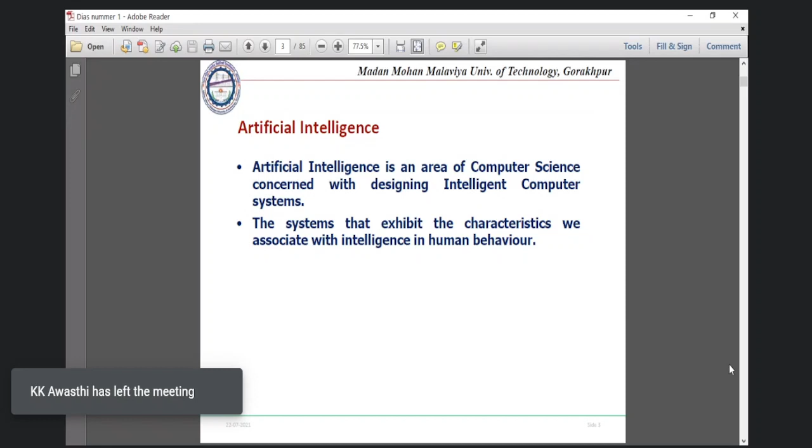We try to capture the intelligence associated with human behavior, or even in nature, whatever processes and happenings we observe, there could be some intelligence associated with that process. So we just try to replicate the intelligence incorporated in that particular process, which is given by our omnipotent God. And we try to incorporate it into some sort of machines, or give it to some algorithms or set of programs, so that it can also perform, as an artificial intelligence, in the same manner as the natural intelligent entity is performing.

So here, if we want to define natural intelligence as simply intelligence, we can say that, as I perceive, as I think, the absolute definition of this intelligence is not there, but there are some attributes through which we can

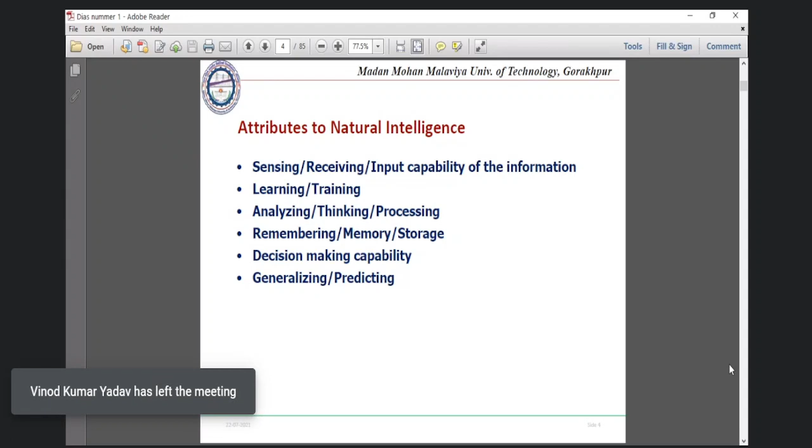coin this natural intelligence and understand what it actually is. The attributes are listed here in this slide. The first, very important one, is sensing, receiving, the input capability of information. Any system which we are going to call an intelligent system must possess a capability of taking inputs. Our computers have a provision to take inputs, and human beings have five sensory organs to take this input. Unless we are able to receive, the rest of the process will go worse.

The second most important thing is the learning and training capability. Intelligent systems or intelligent persons should be able to learn from whatever environment they are put into. Right from our birth, at every moment of our time, not only in schools, colleges, or institutes, but in the environment we face day to day, wherever we are residing, whatever we encounter, from that we are learning, we are getting a sort of training.

Whatever input, whatever training we have perceived, the information received is going to be processed in some way so that some useful or required output could result. This we call the third important attribute of natural intelligence: analyzing, thinking, and processing. Whenever a situation or problem comes to us, we try to find some way to tackle it. The technique or process we apply to solve that problem is nothing but analysis.

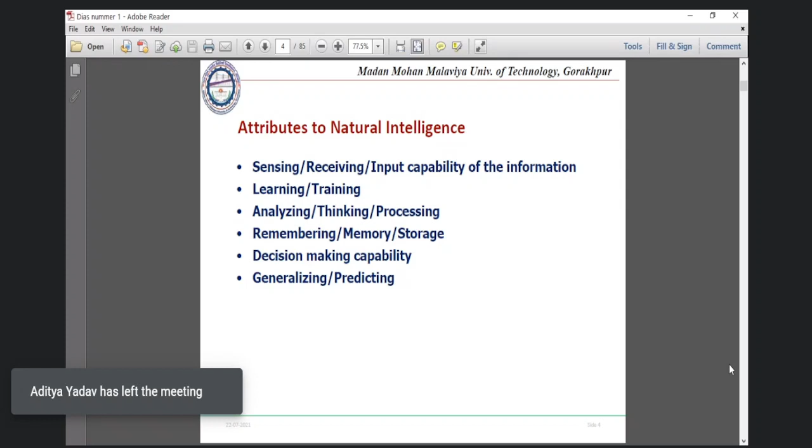The fourth one we can think of is memory, storage, or remembering. There is one component known as a neural network, also known as an intelligent technique, which has been replicated from the functions of the human brain. The human brain has thousands of neurons, and these neurons perform input, output, and several other functions, but their interconnections, the strength of interconnection of those neurons, provides the strength to the memory. The greater the interconnection, the greater our memory capability.

In the computer system, we have some storage chips. You might have seen the very famous movie Ghazni, where Aamir Khan had a short-term memory loss. Can you think of that person as intelligent? Of course not. Because even if other attributes are there, if you are not able to retain information, how will you ultimately process and give output? So this becomes again a very important thing. All computer systems are provided with some sort of memory, just as the interconnection of neurons gives us the strength of memory. This again becomes a very important attribute of intelligence.

Now, if I ask any of you, or you may ask anyone, what is intelligence? Most people answer that it is nothing but decision-making capability. And this is somewhat true, because this becomes the most important thing. Whatever you do, whatever the other attributes are doing, they lead towards this particular attribute: decision-making capability. We have to receive input, get some training based on that, analyze it, and based on our remembrance, for a particular set of data, we are going to take decisions and give some output.

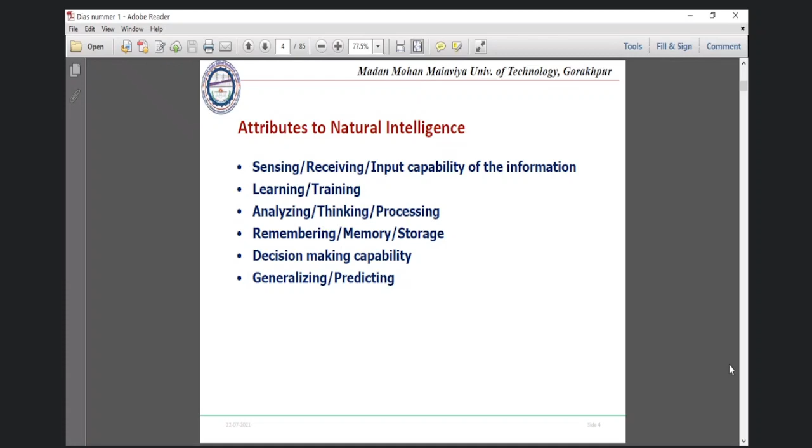Yes. So to be a little interactive, can anyone answer what is the most intelligent entity on this earth? Human beings. Anyone else? We may include the animals as well. Animals. See, if you Google it or search, lots of search engines are available. Chimpanzees are thought to be the most intelligent. The second one is the monkey, and the third one is the elephant. They have got the kind of this percentage of attributes more towards them, and then comes the human being, right?

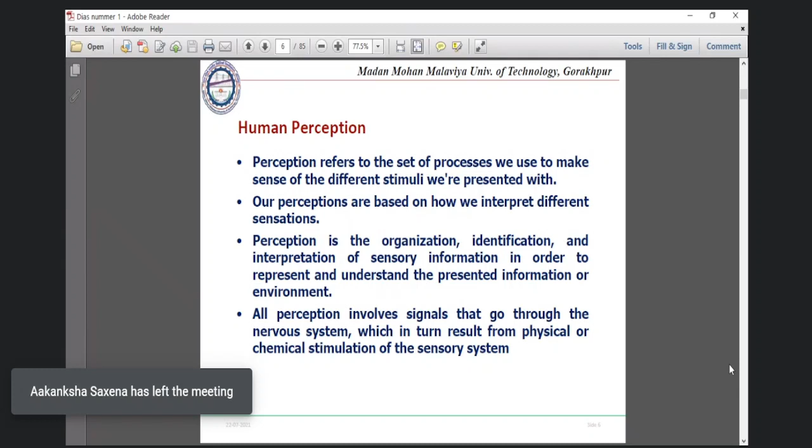Perception refers to the set of processes we use to make sense of different stimuli we are presented with. It is, in fact, the organization, identification, and interpretation of sensory information in order to represent and understand the presented information. Whatever we are presented with, we are provided with 5 sensory organs, which I believe all of you are familiar with. Through these, we take the inputs, and those inputs are the signals, the information. The processed signals become the information. With this information, there are some actions to be further taken, and that is again decided by some kind of processing that happens in our brain.

Whatever we perceive by heart, whatever we see, there are three components: conception, perception, and realization. Whatever we observe, we have a concept or notion of that. If that notion is fully understood and grasped, we call it perceived.

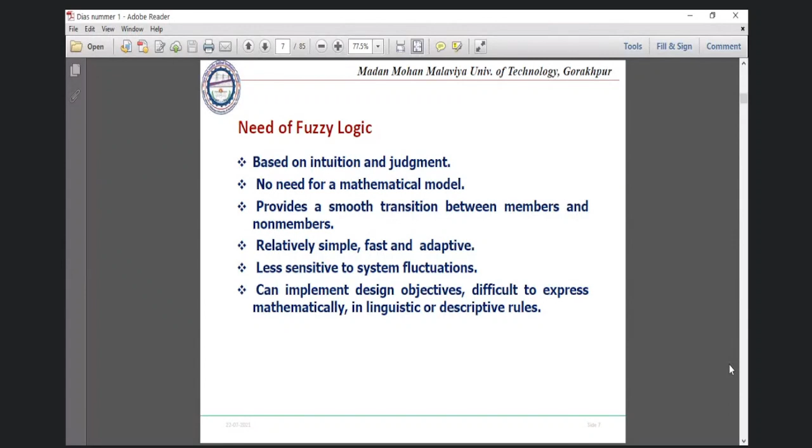Some more points: it's conceptually very easy to understand, very flexible, and as mentioned, tolerant to imprecise data. It handles vagueness, ambiguity, or uncertainty, and can handle partial truth. It can model nonlinear functions of arbitrary complexity, and it can be built on top of the experience of experts.

This could also be thought of as a limitation - the designer of fuzzy controls and fuzzy logic systems should be an expert, because most of the time we are using perceptions. This training may be done through other intelligent techniques as well, sometimes neural networks, but the designer has to be expert.

This is based on natural language, which makes it very simple and powerful. Fuzzy logic can be blended with conventional control techniques - we'll see this at the end of our talk.

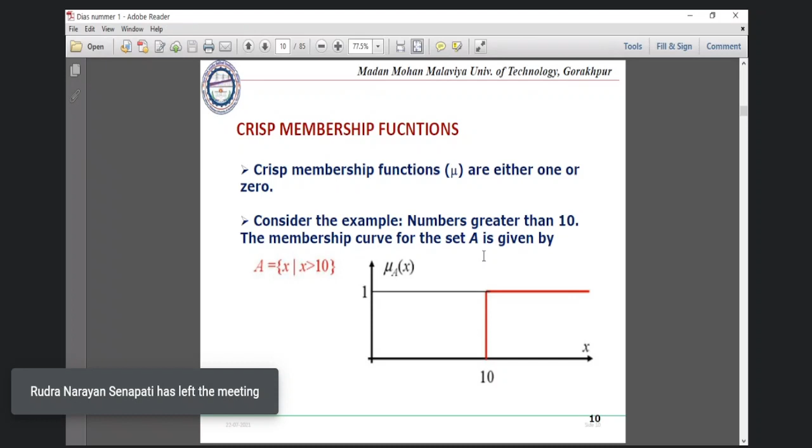So in this classical set, what we see is a very clear logic. Either the elements belong to set A or do not belong at all. So the membership value will be either 1 or 0. And this is given by the graph here: we have the element x, and mu A of x is the membership value. So in a classical set, the membership value is either 0 or 1. So this is Boolean logic also. The numbers which are less than 10 have zero membership function value, and those greater than 10 have 1.

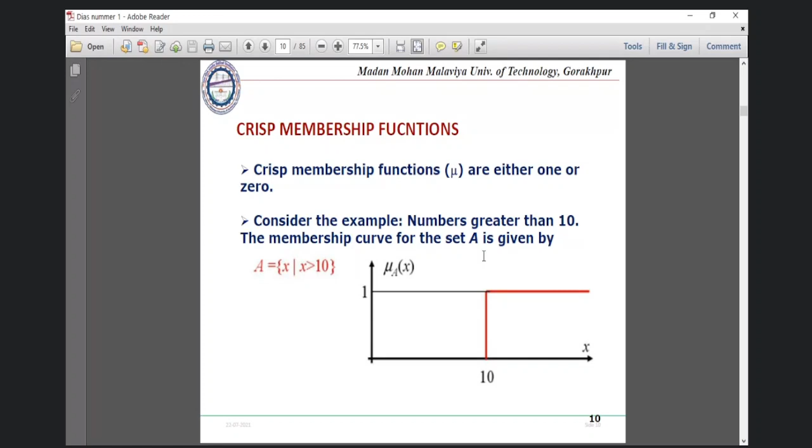But consider a situation where we represent men's height, and let's say we consider heights from 140 to 220 centimeters. We have to categorize this height. So let's say if a person's height is less than 160 centimeters, we'll call those persons of short height. Sorry, let me assume from 170 to 180 as medium height, and let me assume height beyond 190 centimeters as tall, and of course it could not be more than 220. So let me limit it here.

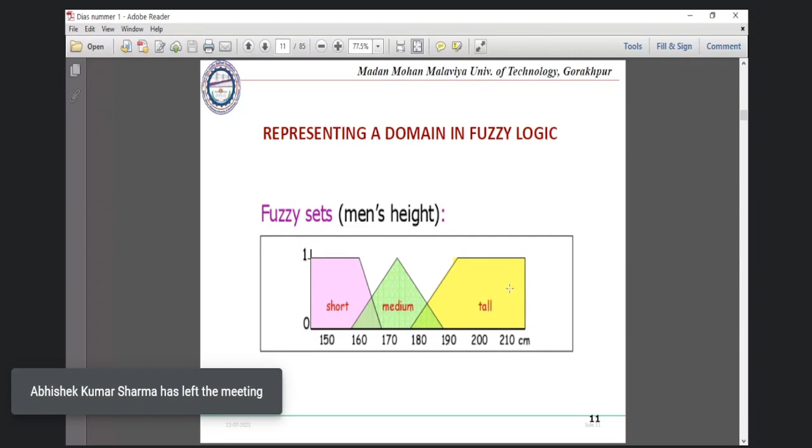Now you can see in this picture there is a lot of overlap between short, medium and tall. So there is no crisp boundary, no clear-cut boundary. Let's say you decide 165 centimeters as the boundary, below which you consider short height and above which medium height. This will not be good at all. Just think of a person who is 164 centimeters and a person who is 166 centimeters. So having a clear distinction, a particular threshold value, will not be wise at all.

So what we do is have an overlapping sort of thing. We can categorize up to 160 maybe as short, but from short to medium or from medium to tall, there is a gradual change, or the boundary is a thicker one. So persons clearly less than, say, 160 will be short, those above 190 will be tall, and in between will be medium. But if a person is 165 centimeters, he can be thought of as short and medium as well. So we can provide some membership value: he is short up to this percentage, medium up to this percentage.

So there is a notion called membership function, which will be assigned to this phenomenon to get a clearer picture. Fuzzy membership functions describe an element x in a set A through a membership function mu A of x. This mu of x will not only have the values 0 and 1, 0 for those not belonging to the fuzzy set and 1 for those completely belonging, but values in between for elements which partially belong.

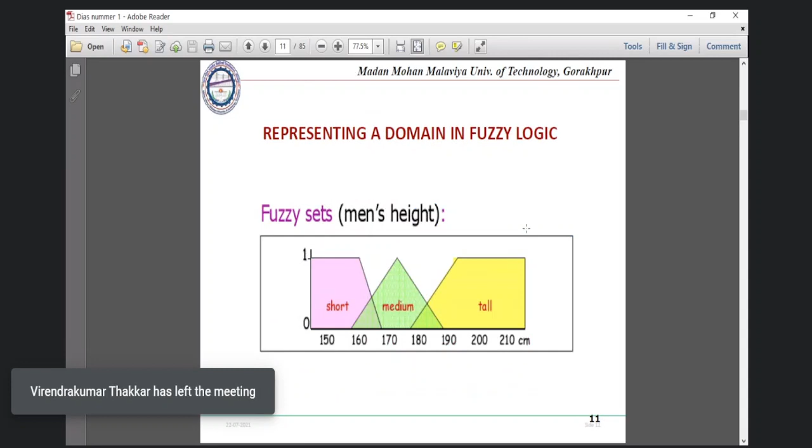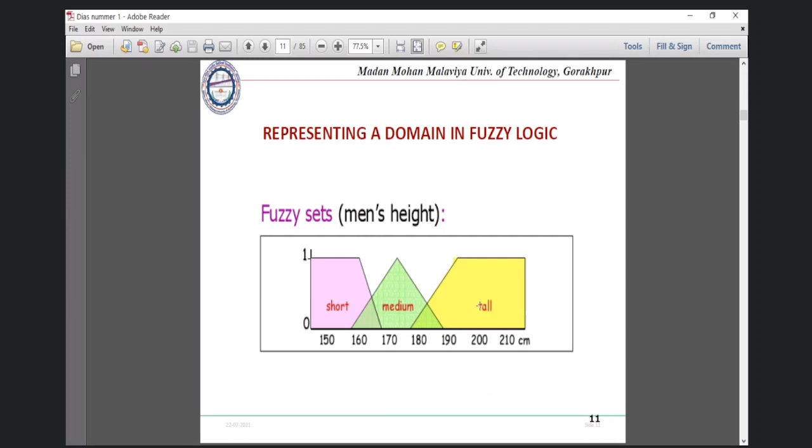So let's say mu tall of 200. Go to the previous slide. See here, 200 centimeters lies entirely in the tall region, so you can assign 200 a membership value of 1. Similarly, 160 centimeters does not belong to the tall region, so you can assign 160 a membership value of 0 for the tall fuzzy set. Like that, you can express this situation in a better way, and that is the power of fuzzy logic.

So in fuzzy logic, you have the elements and the membership function associated with those elements, and they can vary from 0 to 1, representing the degree of belongingness to the set or the degree of truthfulness of that particular phenomenon.

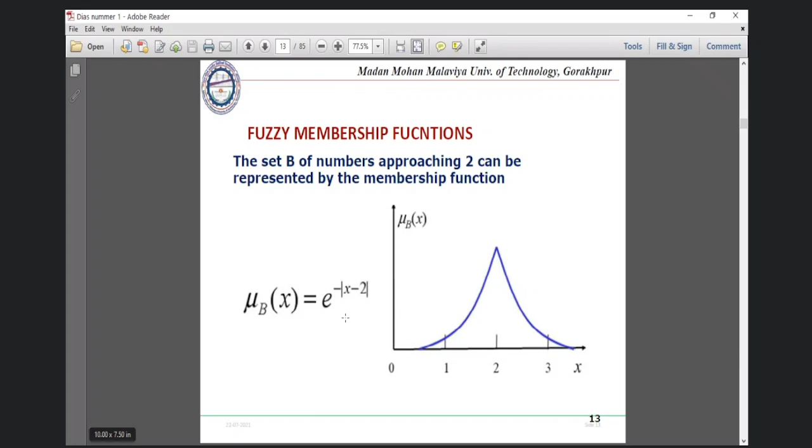So in case of discrete, that was the representation, but there could be a situation where this membership value you need to represent as functions. So here is an example for that. The fuzzy set B, the numbers approaching 2, can be represented by a membership function like this: e raised to the power minus of modulus of x minus 2.

Now, one very common misconception is about fuzziness and probability. Fuzziness is entirely different from probability. In probability, what we see is the chances of happening of an occurrence. So if the probability of a particular event is, let's say, 0.2, it just represents the chances of occurring of that particular event. But fuzziness is entirely different. It represents the belongingness to that particular set: an element is contained in a particular set, and how much it is contained.

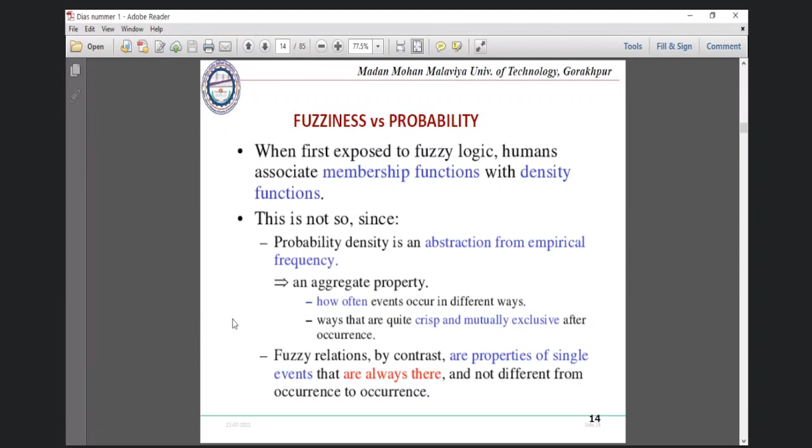So to understand this particular thing, we can take one example. Let's say we have a situation where there is a bottle C, which is labeled with mu C as 0.95, and another bottle A is labeled with some probability function as 0.95. So how are we going to interpret this?

The membership of 0.95 means that the contents of C are fairly similar to perfectly drinkable water. We have a set of all drinkable liquids, so 0.95 is close to perfectly drinkable water, but it will not contain some poison or something.

But the probability of A means that over a long run of experiments, the contents of A are expected to be drinkable in about 95% of the trials. In other words, it may contain poison also. There are 95% chances it will be safe, but 5% chances that it will not be safe to drink. So if that event occurs and you consume that water, it is poisonous, and this will become very dangerous for you. So this is how we can think of fuzziness as different from probability.

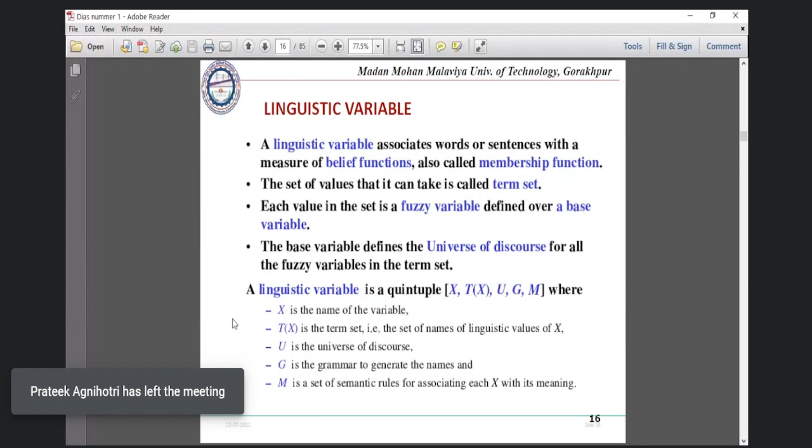In the earlier slide we categorized height as short, medium, and tall. These are nothing but variables; we call them linguistic variables. A linguistic variable associates words or sentences with a measure of belief functions, also called membership functions. The set of values that it can take is called the term set, and each value in the set is a fuzzy variable over a base variable, and the base variable defines the universe of discourse to which all the sets belong.

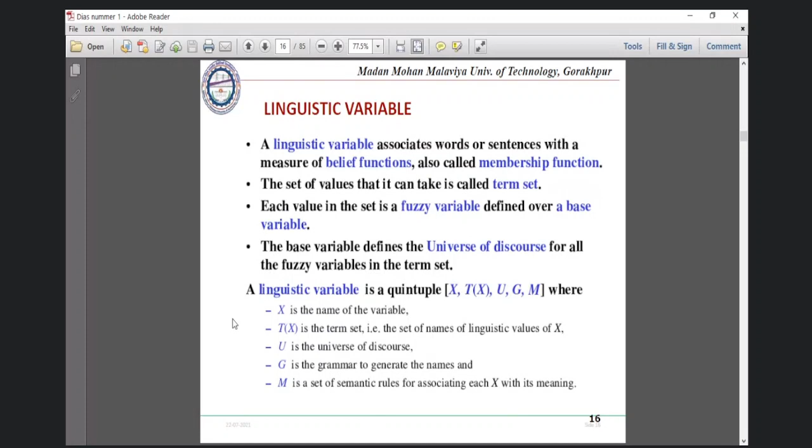So a linguistic variable is a quintuple of 5 things: x, T(x), U, G, M. X is the name of the variable. T of x is the term set. U is the universe of discourse. G is the grammar to generate the name. And M is the set of semantic rules associating each x with its meaning. So this is the terminology. One by one, in the next few slides, we'll be looking at some terminology and concepts of fuzzy logic.

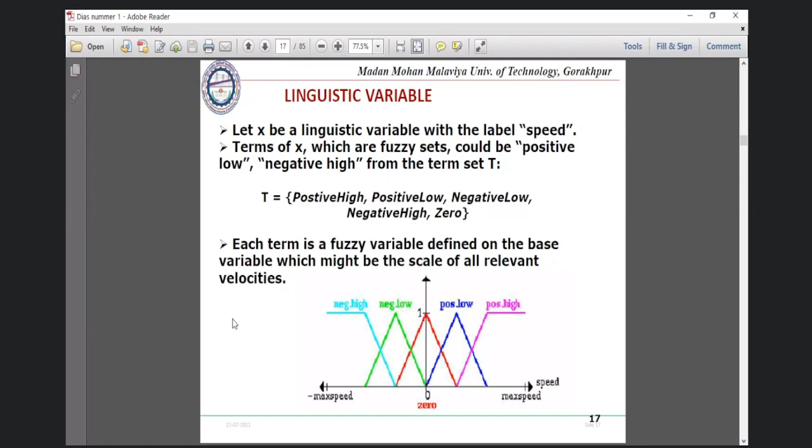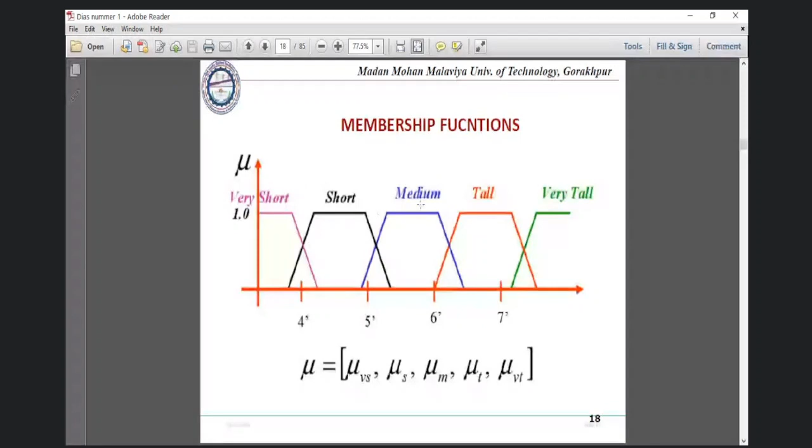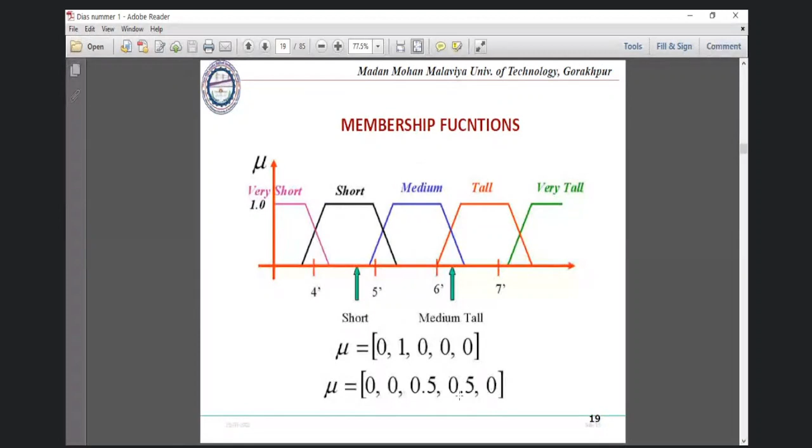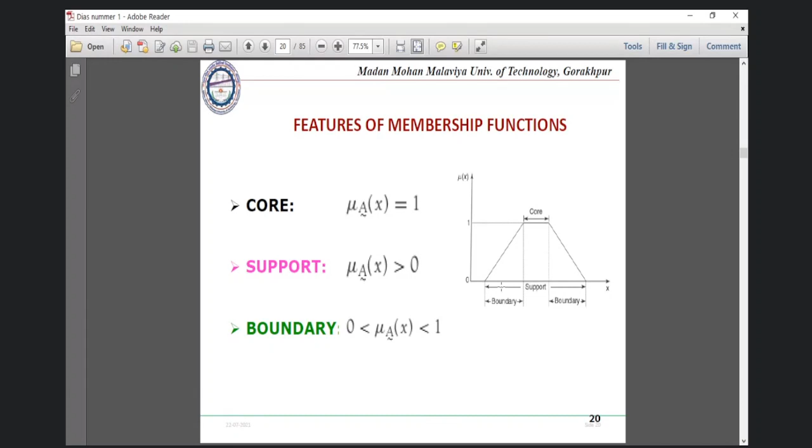And then the boundary we can define as the membership values lying from 0 to 1, and not equal to 1. So clearly you can see in the picture, there is the boundary, in between there is a core, and the total range is support, and where the membership value is 1 is your core. So these are the terminology related to the membership function.

Another component to this fuzzy system is fuzzification. So I have seen the linguistic variables.

So is everything fine, my voice level and PPT? Yes, sir. Okay.

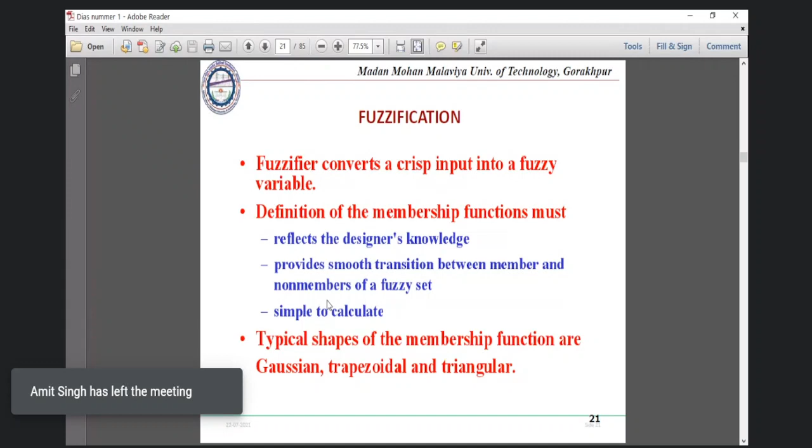So another terminology related to this is fuzzification. In fuzzification, what we do is we have a crisp input and we try to convert it into fuzzy variables, because for the fuzzy system, the input will always be the linguistic variable. So we need to convert into this fuzzy variable from the crisp data set, and there are various methods to it, of course. One prominent method is intuition itself. So we'll use our intuition, our perceptions, to convert those crisp input sets into some sort of fuzzy variables to give to the fuzzy systems.

So the definition of membership function must reflect the designer's knowledge. This provides a smooth transition between members and non-members of the fuzzy set, and that is why we check overlapping in all the categories.

Typical shapes of the membership functions: though various shapes are available, Gaussian, trapezoidal, and triangular are the typical shapes. And most of the time, researchers have used the triangular. In one of the research papers I was going through, the author applied many shapes of membership function, and finally concluded that the triangular one gives the better results.

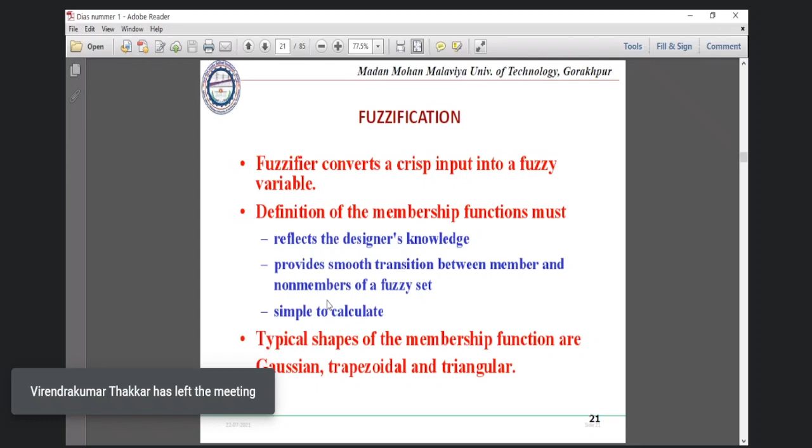And again, how many membership functions have to be taken? Again, there is research over that. In that paper also, they have taken 3 membership functions, then 5, then 7, and further. So there is another thing, which is the number of rules. If you increase the number of functions, of course you will be increasing the number of rules as well.

So if you are with a smaller number of rules, you will be comfortable. But if you are with a large number of rules, of course, those rules may be conflicting in nature. And with that conflict, your results may not be better.

And you have to take more and more care while designing this fuzzy logic system. So that is why we come to an optimal number of membership functions.

So in that paper, I forgot what was that paper. If I see it, I can share that paper at the end of this with the organizer. Those who are interested may refer to it. That's a very wonderful paper.

So in that, the optimal number of membership functions was taken as 7. So the 7 will lead to a large number of 49 rules, right? So what we want to do is, number one, we want to make our problem as simple as possible. And number two, we want to be more accurate. For being more accurate, we want more and more rules.

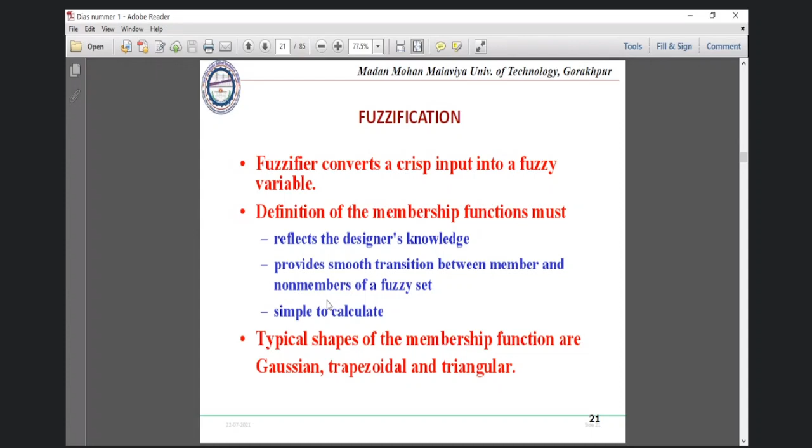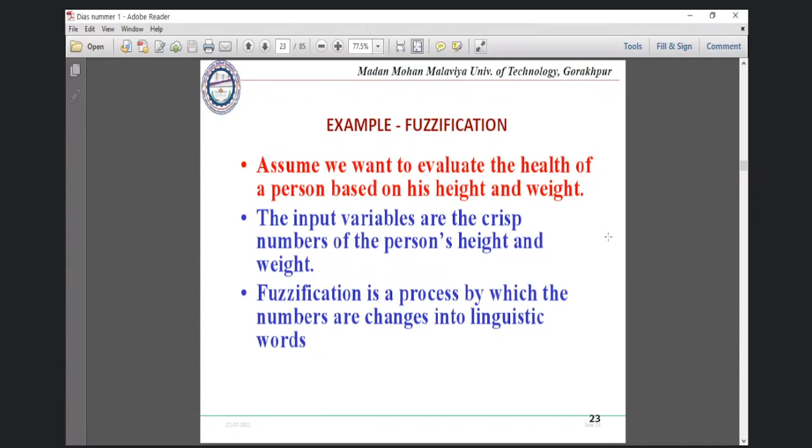So suppose you want to evaluate the health of a person based on his height and weight. So very quickly, I'll show you this example. The input variables, let's say, are the crisp numbers of the person's height and weight. So how it is going to be fuzzified, see in the next slide.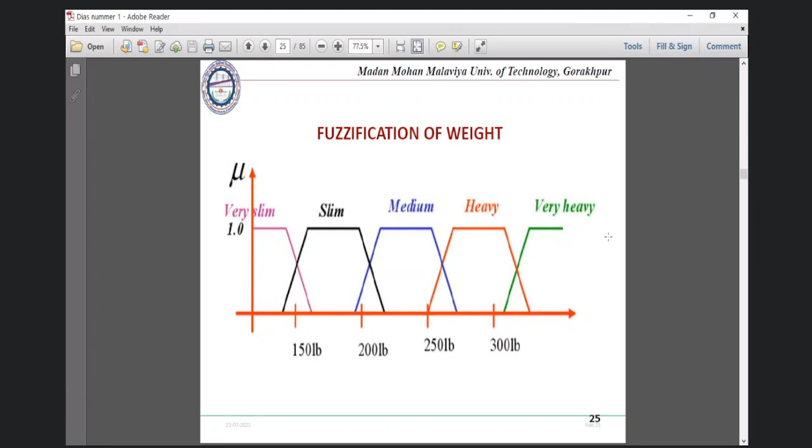Then there are various methods for it. Of course, I'm not going into detail. One I told earlier, the method of intuition; there is the method of inference, rank ordering, angular fuzzy sets, neural networks. Sometimes genetic algorithms are also applied to fuzzify these crisp values. Inductive reasoning is also one of them. You may refer to the literature.

So having understood the first component, fuzzification, now we have the fuzzy linguistic variable ready to input to the fuzzy system. And in between, there is a process. That process will have some sort of transfer function, or here it is a rule-based system or knowledge-based system. Rule-based we'll discuss after defuzzification.

And defuzzification is, in fact, needed. You get the output of this fuzzy system as a linguistic variable, but many times you need to take the crisp value as a command to the controller. So you need to again convert these fuzzy variables into crisp variables to get the actual control.

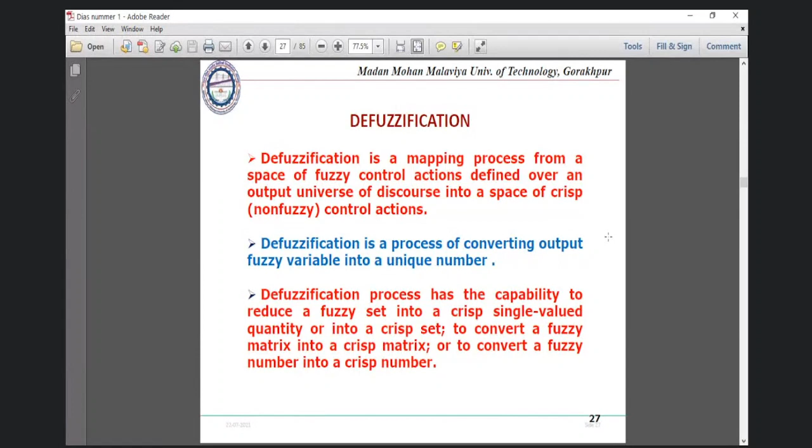So again, there are various methods for the defuzzification: maximum membership principle, centroid method, weighted average method, mean max membership function, center of sums, center of largest area, first of maxima, last of maxima. These are the methods. If you are interested, you can again refer. Just to give you a glimpse of one of the methods.

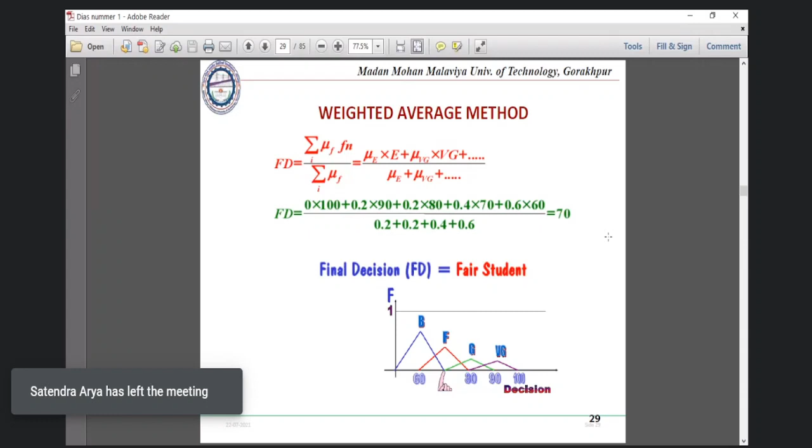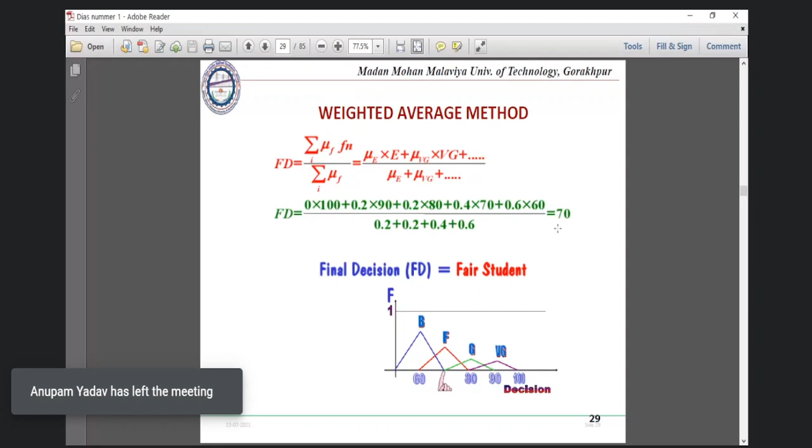So just 30 seconds, I'll take a pause. So, I'm sorry. Is everything okay? Just anybody? Yes, sir. Okay.

So this is one of the methods for defuzzification. From this fuzzy input, we have got some crisp value as 70 here. So these are nothing but all mechanical methods. If we see, we can easily understand those methods.

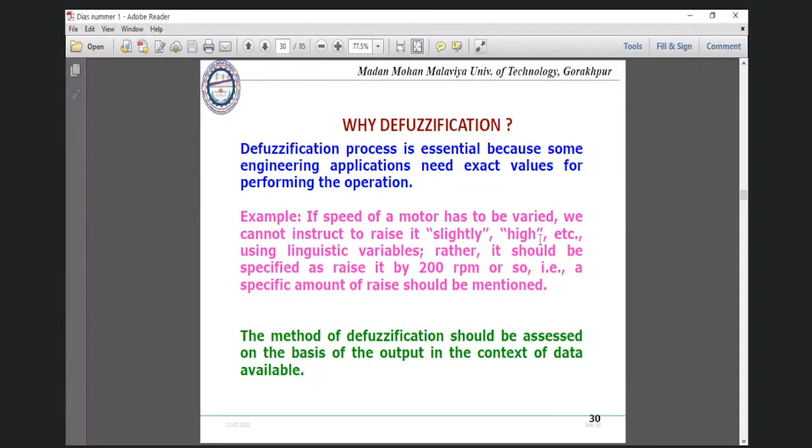Now, why is defuzzification needed? See, suppose the speed of a motor has to be varied; we cannot instruct it in linguistic terms, say raise it slightly or raise it high, using this linguistic variable. So what we do is we try to convert it into the crisp equivalent value. So it should be something like raising by 200 RPM or some other value. So this is why defuzzification is needed.

Now, coming to the heart of this fuzzy system, what we call fuzzy rules, right? And I have repeated many times that fuzzy is replicated from our human perceptions. And in human perception, the logic is: if X is A, then Y is B. The reasoning in our mind always goes something like this: if this is the situation, then this action has to be taken, else some other action has to be taken. So these fuzzy rules consist of if-then, and maybe if-then-else, sort of rules, right?

So just think of a situation where, in winters, at the start, let's say in October or November, we feel a little cold, and then as December comes, we feel a little more cold, and then at the fag end of December or the start of January, there is peak cold, right? These inputs of coldness we take through our sensory organs, and we are not going to measure them through some crisp value, putting in a thermometer or some temperature measuring instrument.

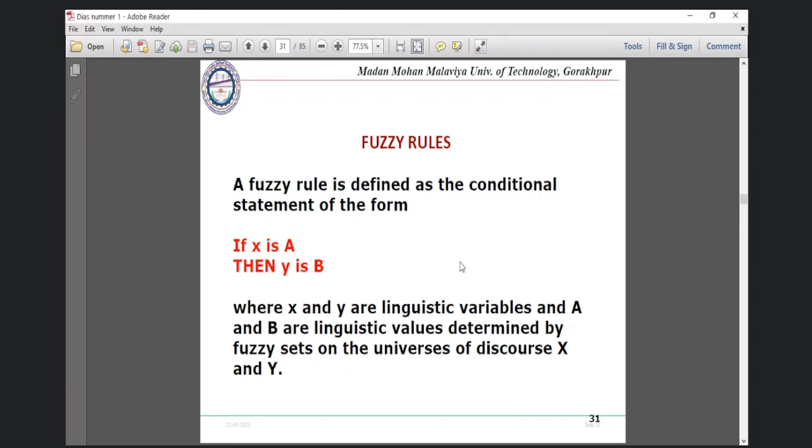So we were on this fuzzy rule base, discussing the kind of rules we'll have, like if X is A then Y is B, and depending on the situation, the number of rules are decided. In this reasoning, what we call the antecedent and the consequent: if the antecedent is something like this, then what will be the consequent out of that? In this decision-making process, rules with sentences use conjunctives like and, or.

Each rule corresponds to a fuzzy relation. This relation again we can think of as a function of functions, as we have seen in classical sets. The same notion has been extended to fuzzy set theory, so we have fuzzy relations and fuzzy mapping. I'm not going into detail of that. So through fuzzy relations, we are trying to achieve some output.

For example, let's say if distance x to the second car is small, or distance y to the obstacle is close, and the speed v is high, then perform large corrections to the steering angle theta, also make medium reduction in the speed v. This rule gives you information on how these rules are framed. There could be three antecedents here, giving you two consequences, two outputs. These are again dependent on the problem.

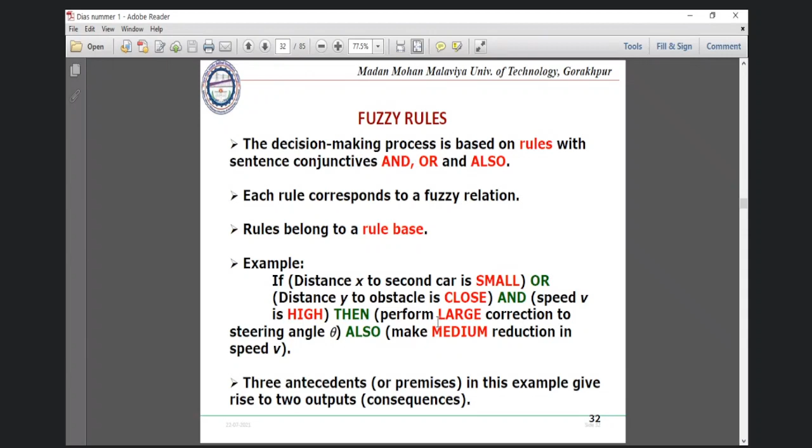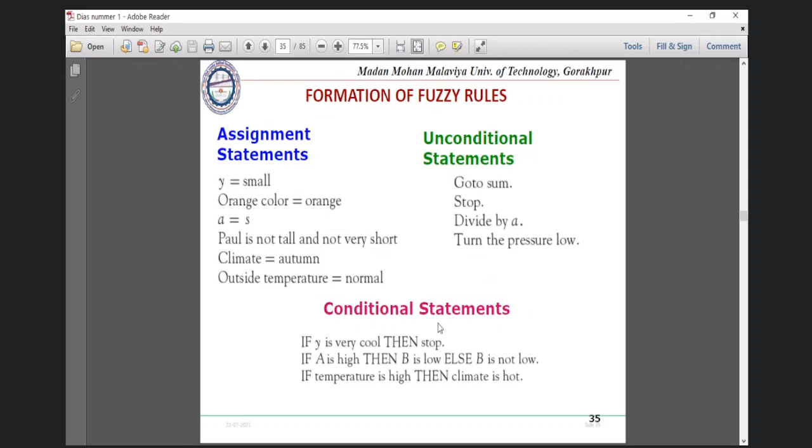In assignment statements, examples cited are something like: Paul is not tall and not very short, Y is some small, something like that. In unconditional statements, we just go to sum or stop, divide by something. And in conditional statements, if y is very cool then stop, something like so - this depends on some conditions.

Then further, the decomposition of these rules: a compound rule is a collection of several simple rules combined together. So there could be multiple conjunctive antecedents or multiple disjunctive antecedents, and there could be conditional statements also using else or unless.

This intersection operation - you can just think of these as equivalent. This AND logic is equivalent to intersection in set theory. So in reasoning we denote this AND logic, and we can combine it all into AM, and simply say if X is AM, then Y is VM. So AM and VM are the input and output fuzzy linguistic variables related to these fuzzy sets.

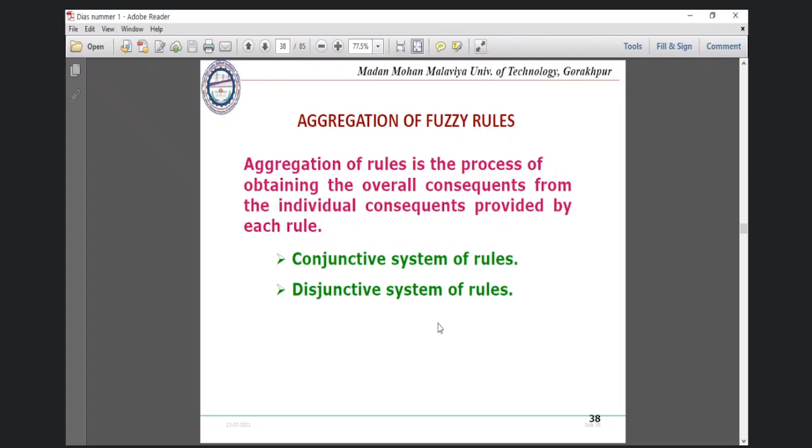Now, all these fuzzy rules are aggregated to obtain the overall output or the consequents from the individual consequents. So there could be several outputs and they could be superimposed to get some final output. This is again similar to that, showing this aggregation of fuzzy rules.

This one example: let me have three rules. Rule 1: if height is short, then weight is light. Rule 2: if the height is medium, then the weight is medium. Rule 3: if the height is tall, then weight is heavy. So suppose I take these three fuzzy rules.

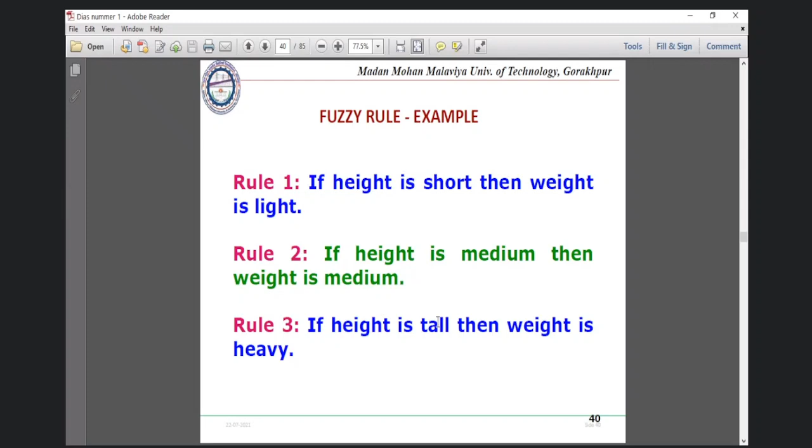So our problem is: given the membership function for short, medium, tall height, and light, medium, heavy weight, the three fuzzy rules, and the fact that John's height is 6 feet 1 inch, estimate John's weight based on this height information. So we can go through this.

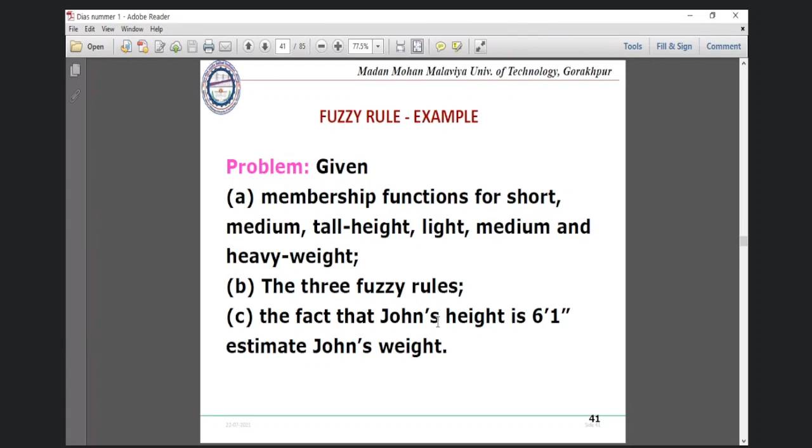Let me again assume the membership function, the overlapping and all, you just take this. Suppose John is short with a degree of membership function as 0.3, medium height with 0.6, and tall with 0.2. So each rule produces a fuzzy set as the output by truncating the consequent membership function at the value of the antecedent membership function.

See how, for rule 1: here mu denotes the membership function, and here the weight is on the x-axis. See this darker white line is for the weight.

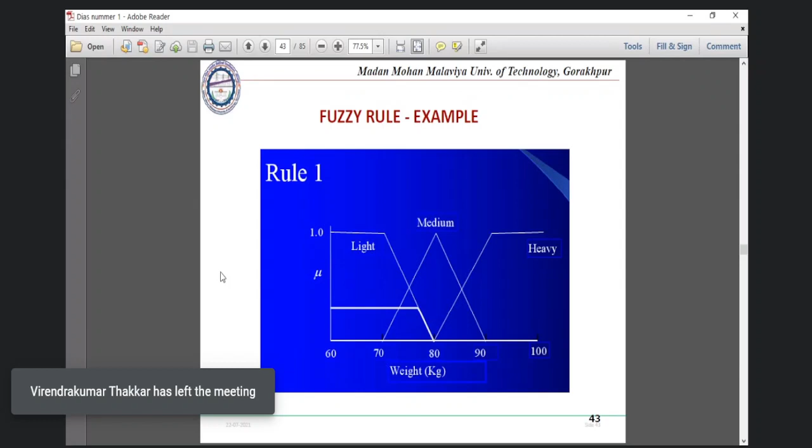If the height is short, then the weight is light. You can see here, if the height is short, so the weight has to be low - this is what anybody can think of. So this is what the outcome of the perception is.

So in this way, we'll take an operation. What is the operation? All three rules have to be simultaneously taken - they have to be true. So for that, we'll have the intersection operation.

If we go for the intersection operation in the classical set, what we do is take the common elements of the two sets. Intersection means if statement 1 is to be true and statement 2 also has to be true, then the overall event will be true when both statements are true. So in a classical set, if there is set A and set B having some elements, the A intersection B will have some elements which are common to both A and B.

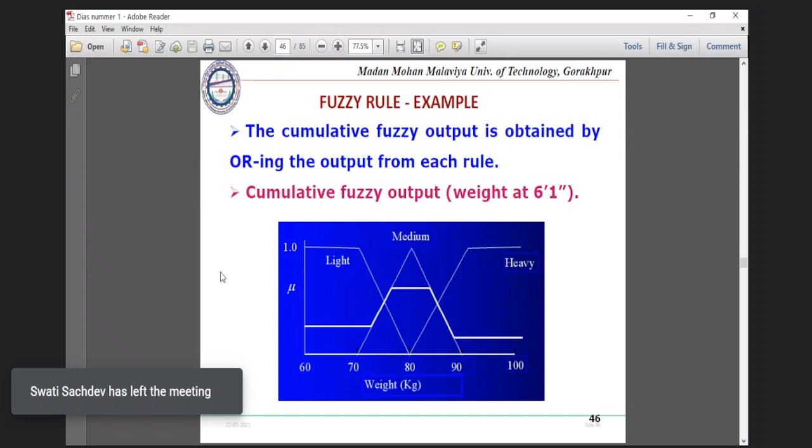Similarly in fuzzy sets, if there are fuzzy set A and fuzzy set B, there are elements in fuzzy set A associated with some membership function value, and elements in B associated with some membership value. Those elements will be common, so we take all the elements in the intersection of this fuzzy set, but with the membership function which is the maximum of the two for union. But for the intersection we take the minimum of the two - the minimum membership function for a particular element as the membership function for the intersection of the two fuzzy sets.

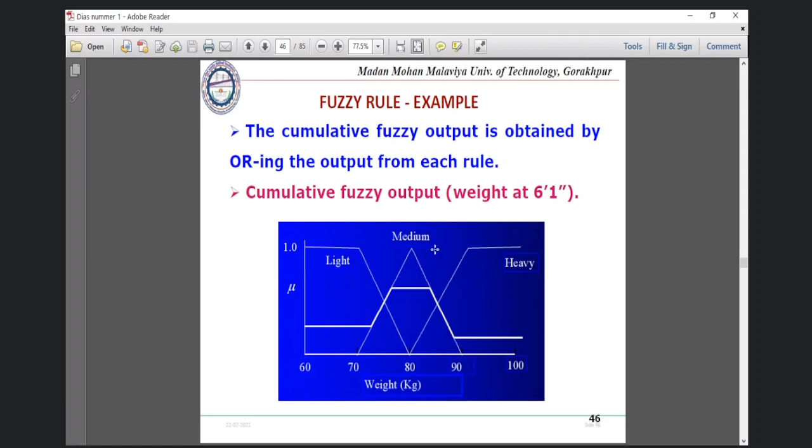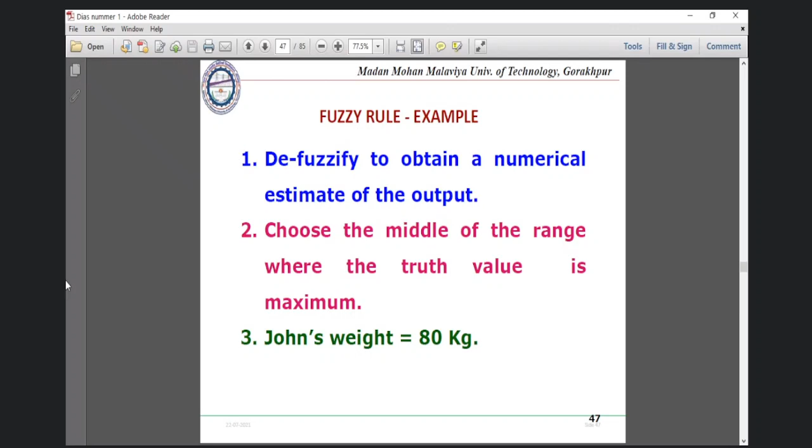If we go through this graphically, we can have this shown with the darker white line. So if we have this fuzzy membership value as the output, or the linguistic variable as the output, now we can defuzzify it - as already discussed, we'll defuzzify it and get the weight value.

Coming again to the fuzzy inference system, which we have already discussed a little. All the fuzzy rules are nothing but just a part of this fuzzy inference system, and they contain if-then logic rules, and they are in fact the system which gives you the fuzzy output. So all the fuzzy rules are contained in this, and we call this FIS, fuzzy inference system.

The primary function of this FIS is decision making through if-then rules. This FIS is what we work with for fuzzy control design. At the end, we'll see how this FIS editor is there in MATLAB's fuzzy logic toolbox, and how we can set the values and design the rules through this FIS system.

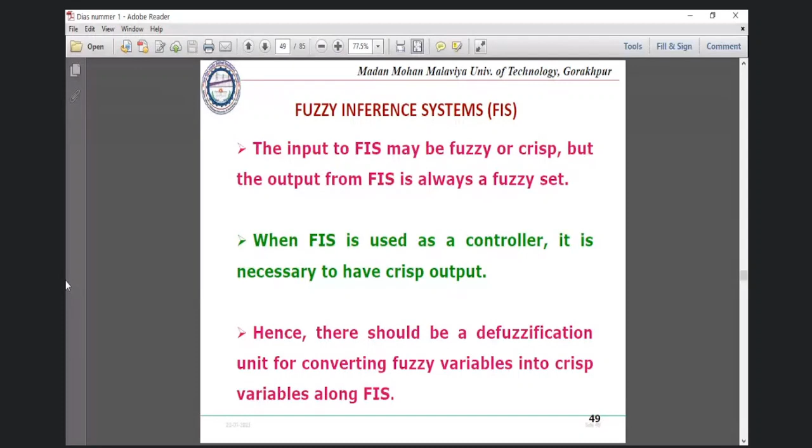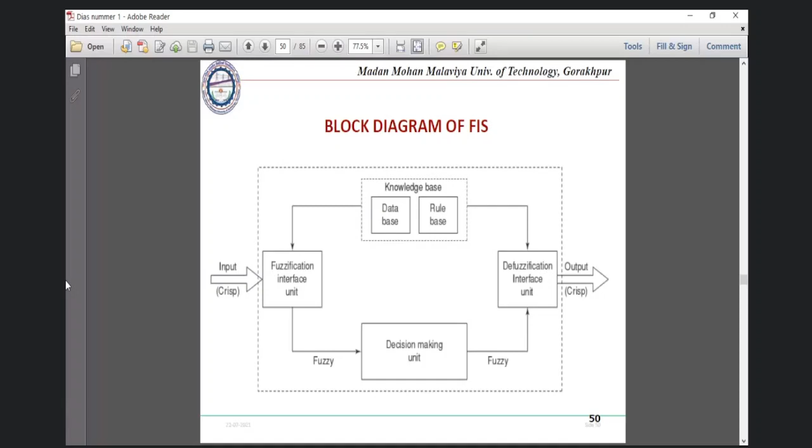There are two types of this FIS system. One is your Mamdani and the other one is Sugeno.

In this Mamdani fuzzy FIS, these input variables are linguistic variables. We need to determine the membership values first, and then we evaluate the rules based on the membership value, then aggregate the rule output, unify all the membership values for the output from all the rules, and then finally defuzzify the output.

There are various methods here, one such is called center of gravity, and this is sometimes called approximation by summation. This is a very simple method, similar to what we have seen in mechanics for how to find out the formula for the center of gravity.

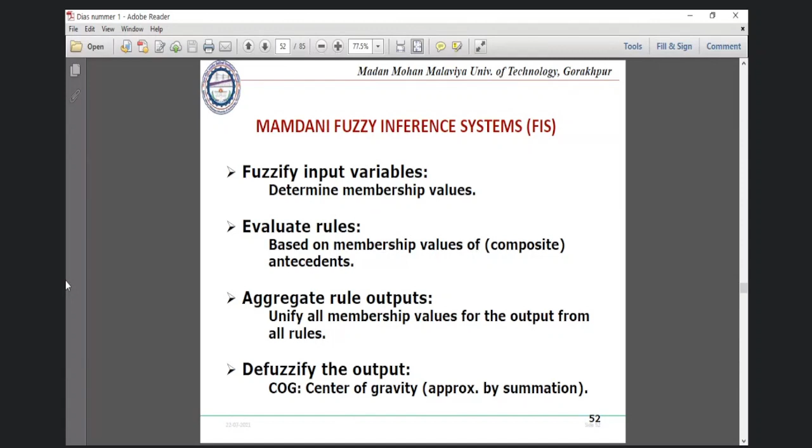In Sugeno kind of FIS, again there are mainly the same steps. The main difference between Mamdani and Sugeno method is that Sugeno output membership functions are either linear or constant. So they differ in their output variables.

So with this notion of fuzzy logic, now we can move to the fuzzy control system. Here is a control system. What we mean by control system is something to achieve the desired objective. So the process, or set of systems through which we obtain the desired output, we call the control system.

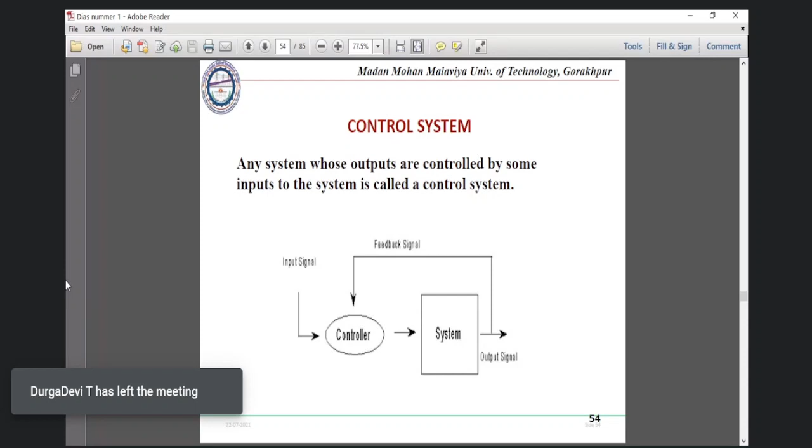There could be the whole system put together to achieve that objective, or there could be a single dedicated device known as a controller to achieve that objective. So this is all for the control system. And of course, we had seen there are broadly two types: one is open loop and the other is closed loop.

In the open loop case, the accuracy of the output mainly depends on the input calibrations, and there is no other tool to handle the desired output. But in the feedback sort of thing, which is most popular, what we do is try to measure the output obtained, and then compare this measured output with some sort of reference or checkpoint, and thus we obtain some error.

With this error, we give it to some device which we generally call a controller, and generate some control signal, through which we try to manipulate some variables known as manipulated variables or controlling variables, the variables by which we get control over the controlled variable or output variable. So the output variables are the variables for which we want the desired reference or set point. But this we obtain through some controlling variable that we call the manipulated variable. So we generate a command signal through the controller to manipulate that particular variable.

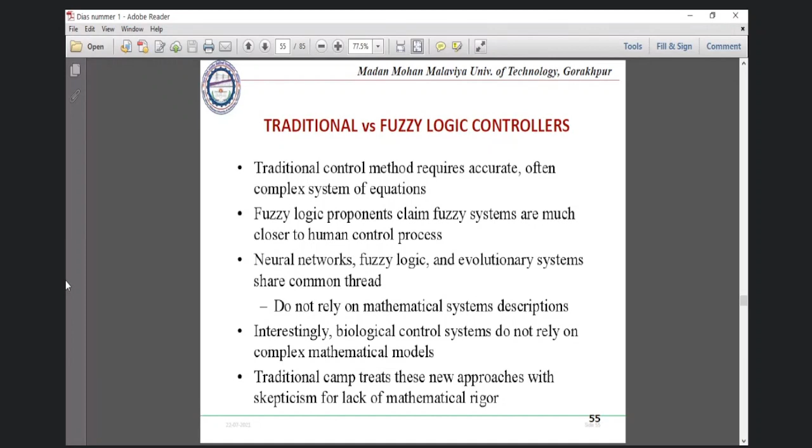There is one important point here: the fuzzy control. Our most important application of this fuzzy control theory, fuzzy set theory, in fact. This expert knowledge is used instead of a differential equation to describe a system. Means the designer of this fuzzy logic controller must be expert. They must be familiar with the kind of designing this fuzzy rule.

Suppose we are designing, let's say, a fuzzy controller for the speed control of the motor. So the designer must be familiar with, if let's say the speed is high, what the range of the voltage or the other variable is required to make that speed high. Similarly, if the desired speed is low, what is the equivalent range of the voltage, or let's say if some flux or some other variable is involved, what is that range.

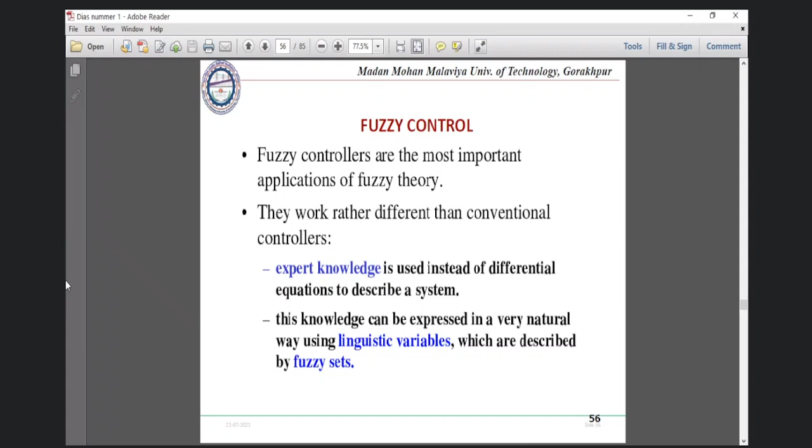So that particular expertise, that particular knowledge should be there with the expert who is going to design this fuzzy logic controller. The most powerful thing is we are going to use this natural language as linguistic variables.

Although application of this fuzzy logic to industrial problems has often produced results superior to classical control, the design procedures are limited by the heuristic rules of the systems. This is very, very important. And see, there are situations where this application of fuzzy logic control will be justified, though the researchers are using it at so many places. Sometimes it is required and sometimes it may not be required. Still they are using it for the sake of research.

But there are situations where this has to be applied. So one should be very, very cautious, in fact, about where to apply this fuzzy logic controller and, right, where not to use this, right?

So this fuzzy logic based approach for solving problems in control has been found in those systems generally which are very, very complex, and some of those which happen to be non-linear, some having some parameter uncertainty, right? So in fact, this technology is applicable to situations where imprecision, or vagueness, or uncertainty is there. So many of the researchers are using this fuzzy control in the robust control area. The robust control area is again an area where people handle this uncertainty.

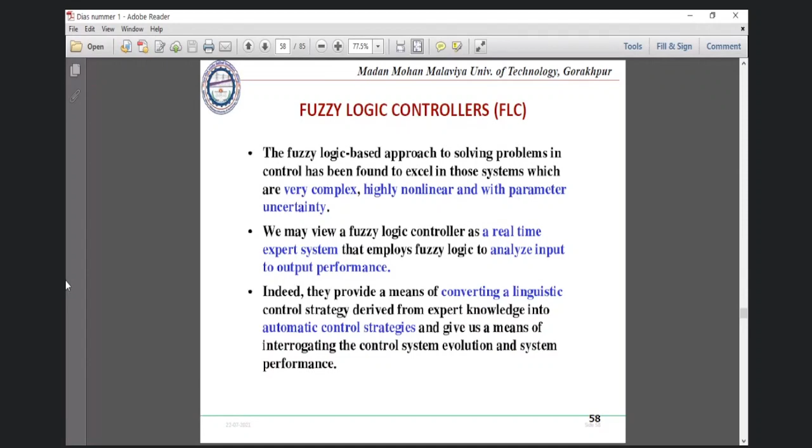So out of this measurement, in general, in a fuzzy system, we have the error as one thing. And along with that error, we have in general the change in error, the rate of that error, how this error is changing. So these two informations we feed to the controller, and the controller also has some reference set point, and then this generates control effort U, which is in fact the objective of this control design. So we have to design this control effort U so that the objective is achieved.

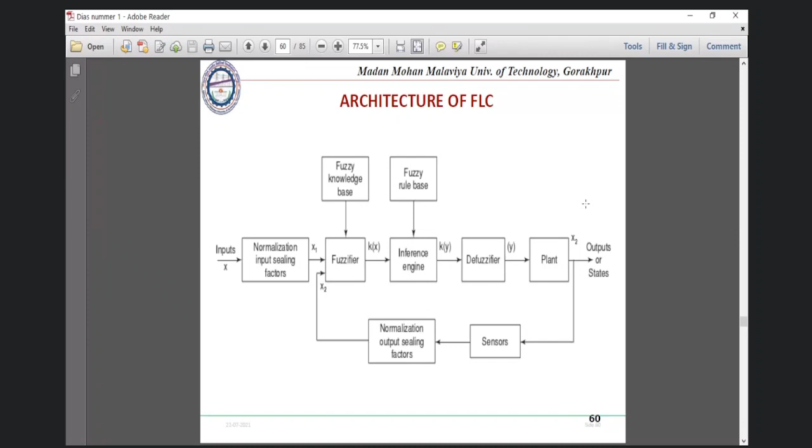And then for the input, this is again converted through the normalization input scaling factors into some suitable form, and then given to the fuzzifier block so that the linguistic variables are obtained, taking the help of the fuzzy knowledge base. This is given to the fuzzy inference system, which takes help of the fuzzy rule base, of course, and then the output is defuzzified through the defuzzifier block, and finally the crisp generated control effort is given to the plant to take the final control action, and this way the final objective of the control is achieved.

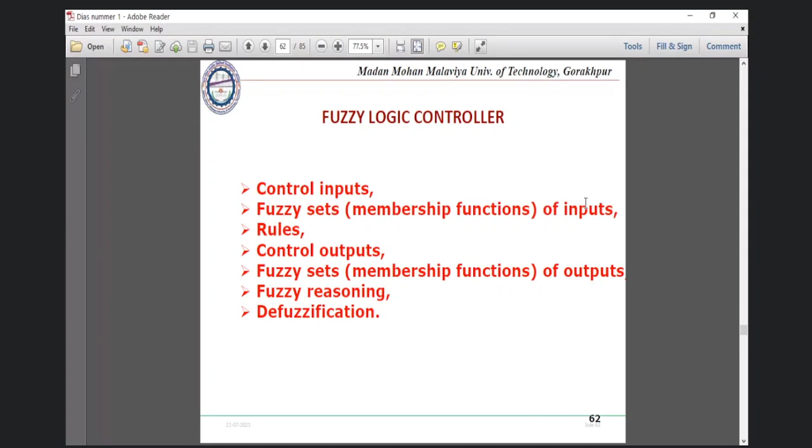So this is some description we have already discussed. This fuzzy logic controller: we have seen the control inputs, fuzzy sets, rules, control outputs, fuzzy reasoning, and defuzzification. These are the components that we have seen. And there are again some points written here. The control input, as I just told you, in general is what we take as the error and change in error. Right?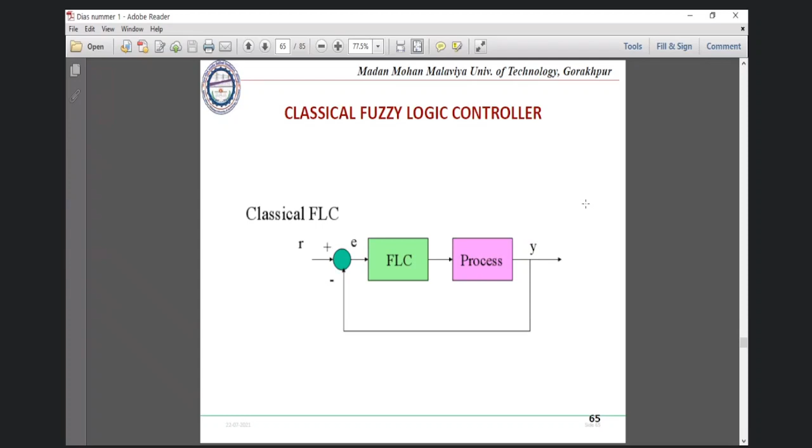Again, this slide doesn't need any explanation. This is just a picture of the classical control. Now this fuzzy logic controller takes the place of that classical control. As an example, we can take what is very, very popular, the PID controller: proportional, integral, and derivative. Even today, most industries take the PID controller as their controller. This is a very, very excellent controller. And of course,

these do not actually require large effort or thorough knowledge. Even a foreman can tune this PID controller. There is a very conventional empirical tuning method, the Ziegler-Nichols method. That's some empirical formula sort of thing. So if we have some control objective, what will be the parameters of this PID controller, Kp, Ki, and Kd? With the perception of that expert, we can just tune this PID controller.

So what, in fact, are the control objectives? In general, we want the system to behave in a fast manner. We want the fast response, one thing. We want no overshoot in the system. And we want that if the output settles to a certain value, it should not have any deviation from the nominal or reference value, what we call the steady state error or offset. There could be other objectives as well, but you can think of the primary control objectives as fast response with no or less overshoot, and second, no steady state error or the minimum possible steady state error.

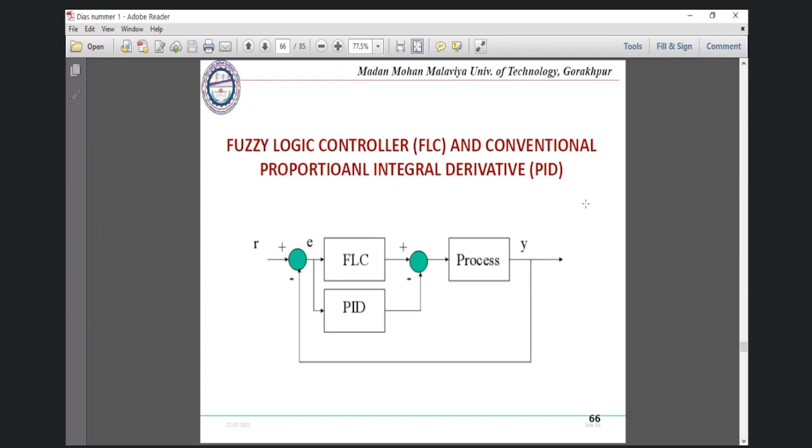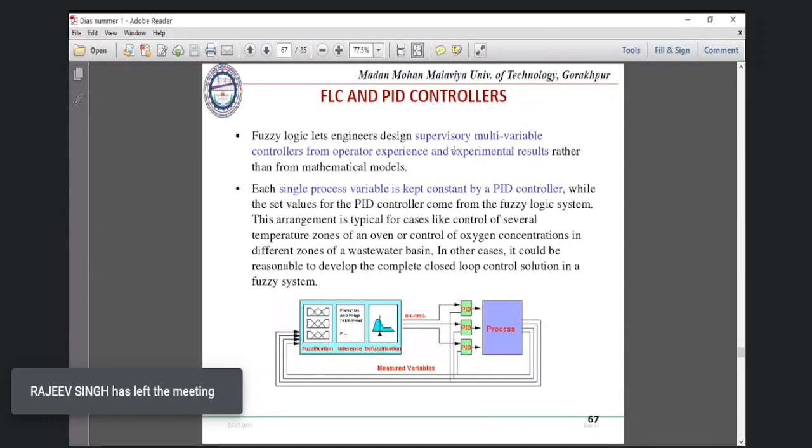So here I have taken one such example where I'm using FLC and PID in parallel, right? In parallel. Fuzzy logic lets the engineer design supervisory or multivariable controllers from operator experience and experimental results rather than from mathematical models. If a number of these units are there, each single process variable is kept constant by a PID controller, while the set values for the PID controller come from the fuzzy logic system. So this could be one way of utilizing the fuzzy controller and PID controller in parallel.

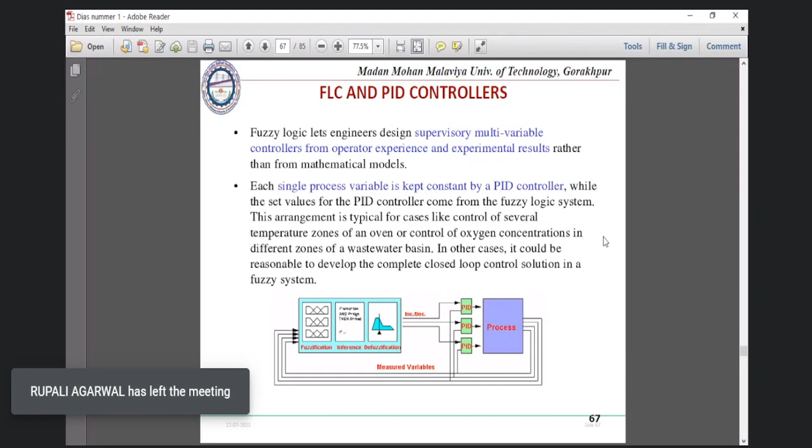This arrangement is typical for cases like control of several temperature zones of an oven, or control of oxygen concentrations in different zones of wastewater basins. Right. So this is just to present you one example. And this is the control block diagram. This is the dynamic system output, and r(t) is the command reference point. The error goes into the controller, the control input is generated and finally given to the dynamic system, which has some disturbance as well.

So this is showing a picture of this, through a Mamdani sort of system. You have the membership functions again, and this table depicts the rules. You can see there are 25 rules. You can think of a rule something like: if this is negative low and this is negative low, then the output will be positive low, something like that. These are the real rule bases which are incorporated in this FIS to produce your desired output.

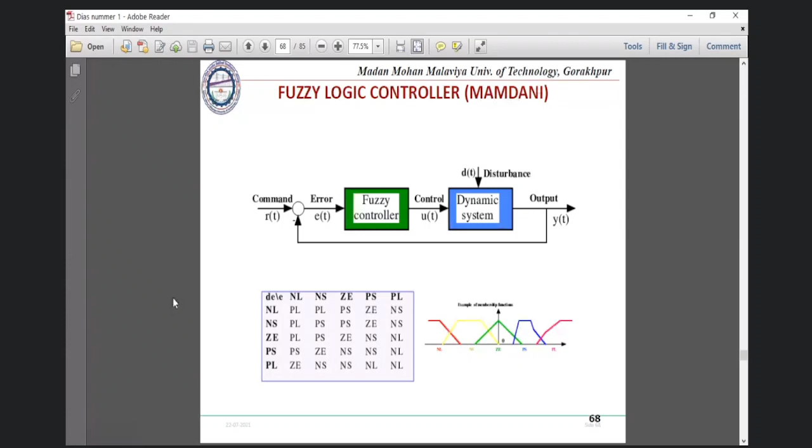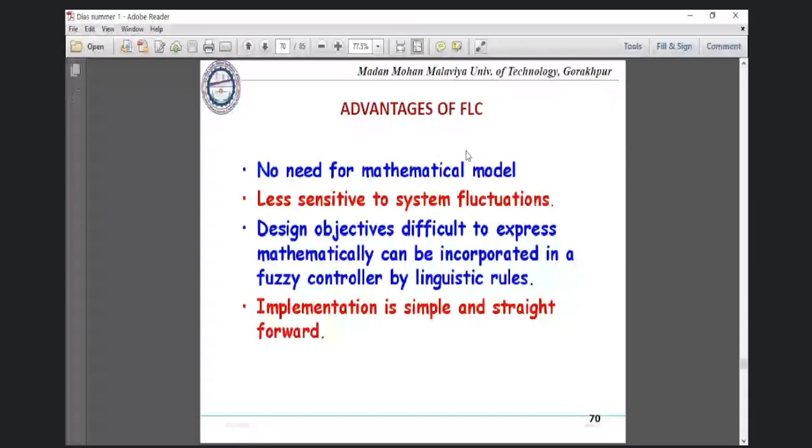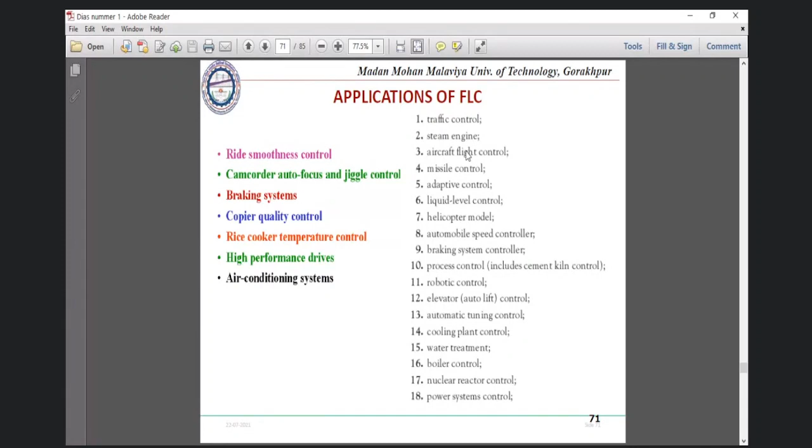Now, I will be taking 5 to 6 more minutes of your time. I think this lecture is going to be very lengthy. I believe I'm not boring you. I'm just trying to give you the whole picture of fuzzy logic technology so that even if you are not familiar at all, you can begin with it.

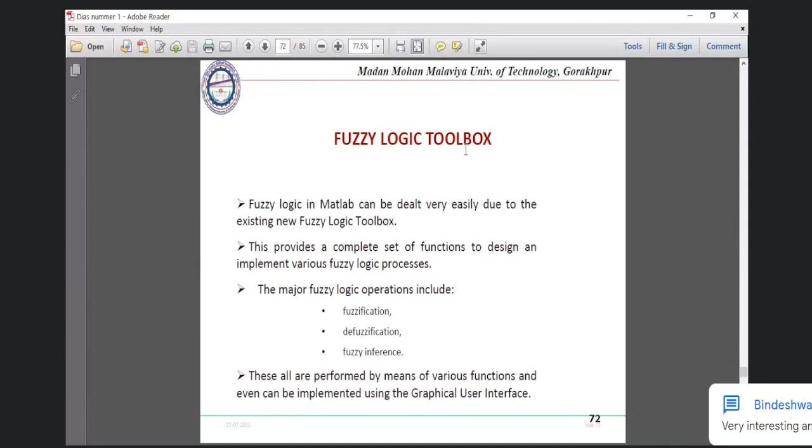Right. So the fuzzy logic toolbox is available in MATLAB, and it provides the fuzzy inference system, FIS, which you can integrate into a Simulink block. Other ways are also possible. You can create standalone C programs that call fuzzy systems built with MATLAB.

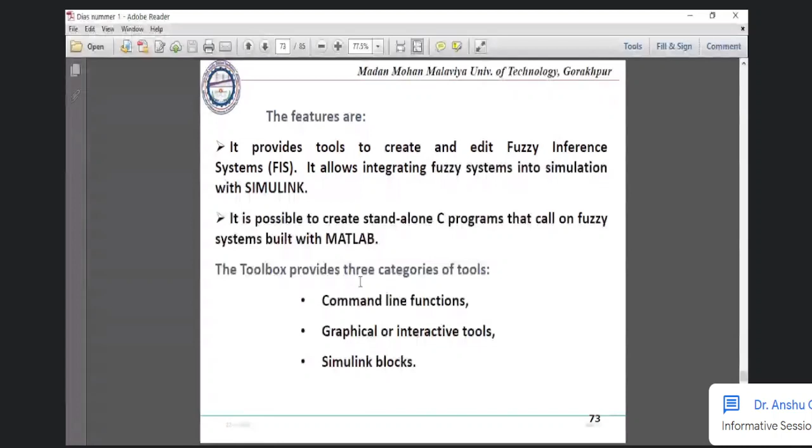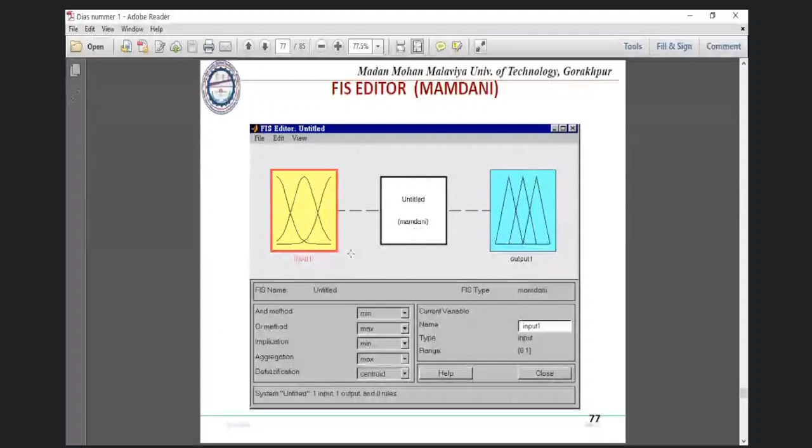So here it is written as in the FIS editor, and you can save it by giving some name. And this file, edit and view, you can set through this option. And what you do is you need to set the input and then the output. You set the number of inputs, you set the range of the input and output, and then this is again input one, input two, and this you can all set. They are very user friendly.

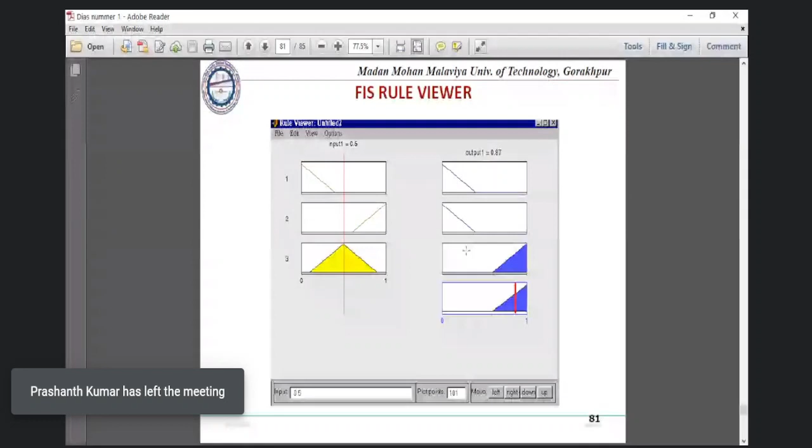And again, you can add rules, delete rules or change rules. So whatever you feel like you can do in this system. And these are all very user friendly. So this way you incorporate the editor with the rule base. So this way your FIS editor has now been designed with the rules which you have provided. Now, you can integrate this with the Simulink control block by importing it from there, and then you can run it. You can see the FIS rules here.